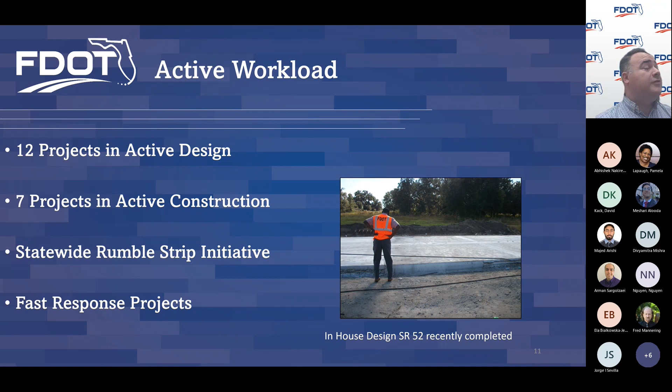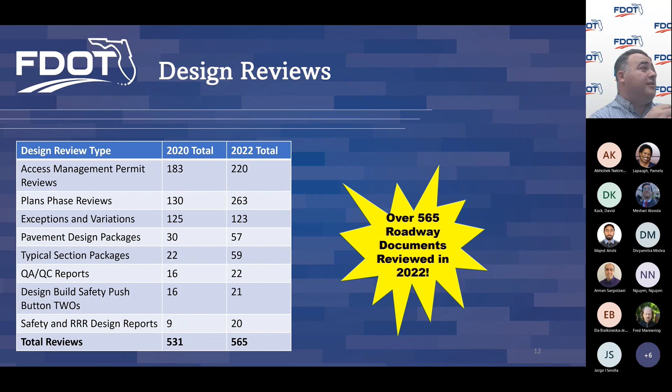We also do a tremendous amount of reviews because we manage what we call the work program, which covers all of our projects programmed for 5 years. We have a lot of consultants - we do about 15 to 20% of designs in-house and sub out about 85% to consultants. So we have a tremendous amount of reviews we look at for all of those things, and in a given year we're doing between 530 to 565 reviews.

We also bring in consultants to do this work, so we have to procure them - about 60 negotiations per year. We're a really busy group. We also support all of the other aspects of the department: project management, traffic operations, construction, maintenance, legal, and all these different groups. We're constantly working with all these different groups to implement the work program and provide guidance on criteria and things like that.

We also have a lot of innovation - we're constantly working on different things. The latest development in the last 3 to 5 years has been 3D design and modeling with 3D design software, which we're working on.

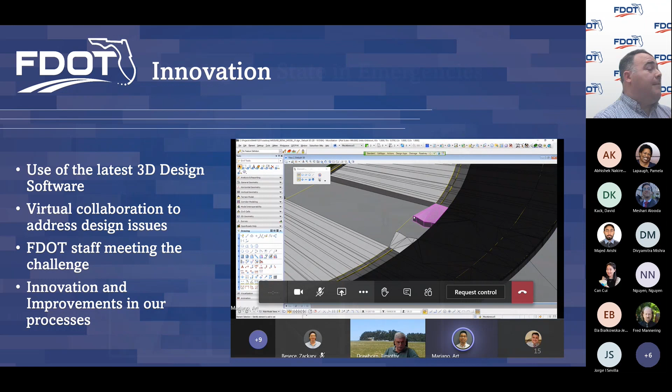One thing surprising that you might not think about is that when a disaster comes, we are called upon to support in the emergency response and preparation.

So when Hurricane Ian came last year, prior to the storm we were setting up planning for emergency detours and figuring that out. After the storm came through, we worked on emergency bridge inspection, and we were also dispatched to Sarasota and other counties to assess the damage so we could get roadways clear. You also heard about the Sanibel Causeway and the bridges that were washed out. Department staff were heavily involved, along with contractors and consultants, getting that bridge restored so citizens could get access to that barrier island. So a lot of different things.

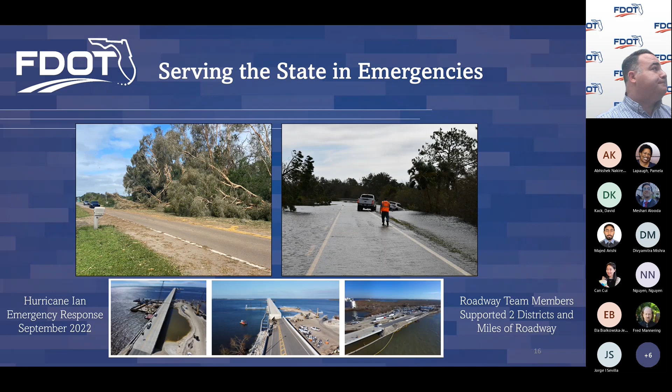I had this question, and I thought it was a really good topic to prepare everyone for when they go into their careers. So the question is, what do you think are some of the biggest challenges for engineers today? The answers to this have come through a lot of discussion internally, so I want to get your impressions of what you think is the biggest challenge to engineers today.

3D ORD, yes, that's Open Roads Designer. Politics, yeah, that's true. Politics can definitely get in the way. Solutions out of the box. Construction. Maintenance, yes.

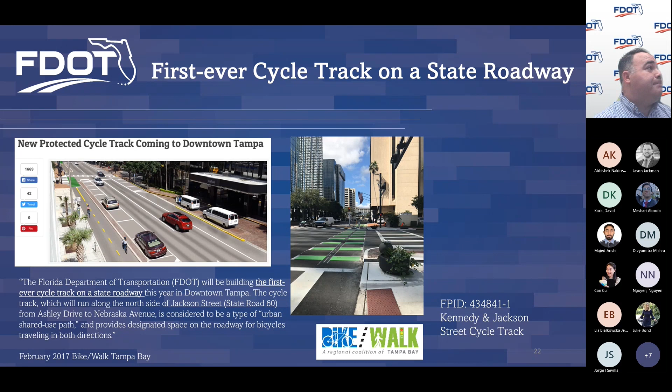About once or twice a month, we come out and ride to USF. I don't know exactly how many students ride, but we do that quite frequently. I know that CUTR also has a bike club, which Jason Jackman runs. It's a great opportunity to get out and be a user of the roadway, and it's important that we take care of all of our users—not only drivers, but pedestrians, cyclists, micro mobility users, all different types of users.

This is the Old Tampa Bay Water Quality Improvement Project. When I was a district drainage engineer, I was able to work on this project. It was brought to us by some consultants, and it's been a great project—we're seeing some really positive benefits from it.

Many of you are probably familiar with the Courtney Campbell Causeway and Ben T. Davis Beach. What we found through talking with our experts is that causeways block the natural circulation pattern of the water bodies they pass through. This leads to a reduction in water quality because that water gets stagnant, and it adversely impacts seagrasses and marine life.

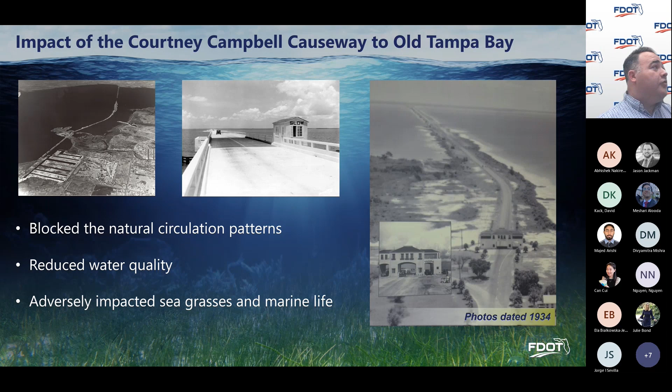So what was presented to us was this project, whose goal was to meet the department's mission, which we shared with you earlier: meet stormwater treatment criteria and exceed it, enhance overall watershed quality, and reduce project footprints and impacts to communities. That was the goal of this project.

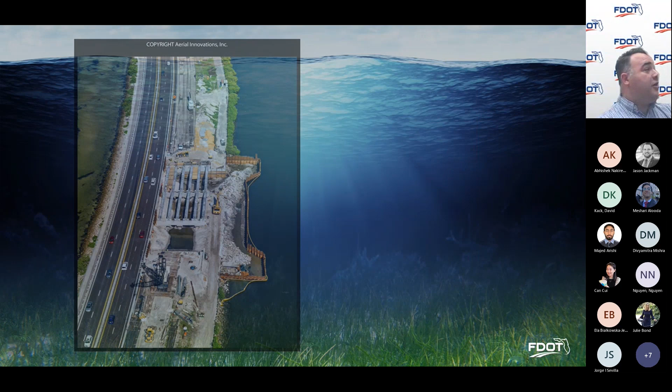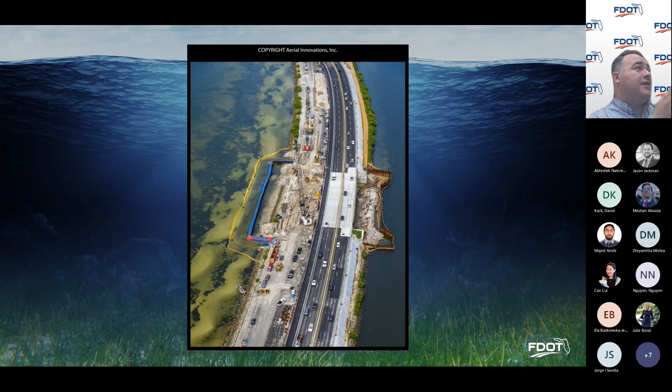These photos show the location and construction of the cut we made in the causeway so that we could restore the natural circulation pattern. They're interesting because they show the construction of a bridge using a cofferdam, and the different ways we worked to dewater the site and construct that bridge to restore that natural connection and flow pattern throughout the area.

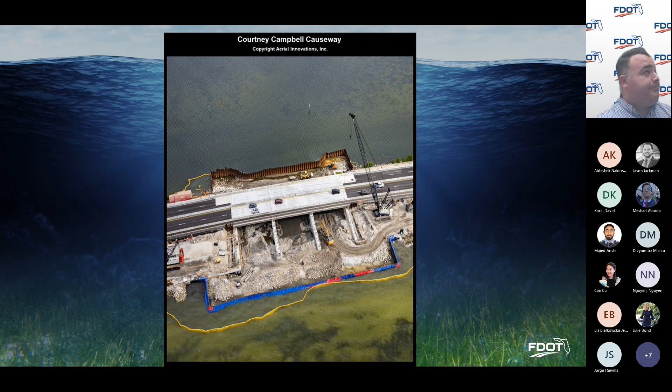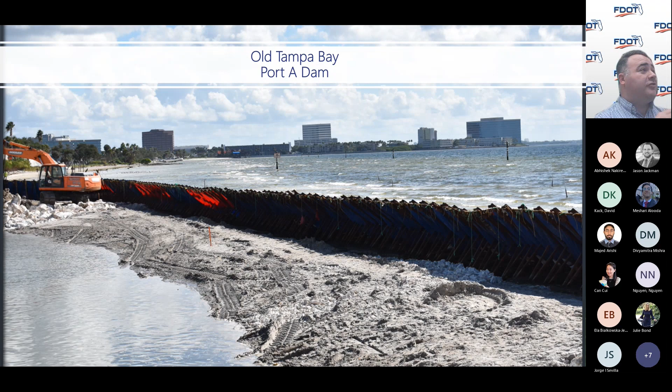This was also another innovation the contractor proposed. They used what they called a Port A Dam, basically a steel bracing system with a high-level liner, which blocked water from entering the construction site. It was a very interesting technique that they used.

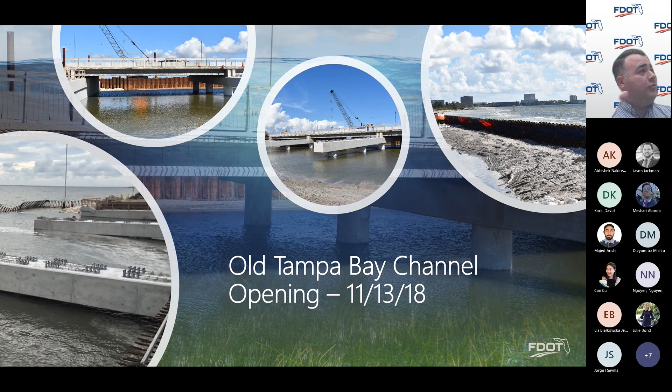The project, or the channel, was opened in November of 2018. Then we did a dye test to confirm that we were going to get the circulation and restore that natural circulation pattern.

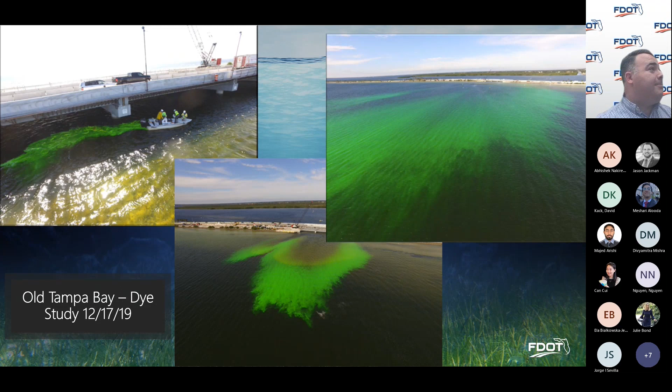Through our studies, we've been going back and studying the effects of this, and we found that we have indeed restored the natural circulation pattern. We restored the natural salinity balance, which was another issue. We've decreased chlorophyll and nitrogen levels, which are primary drivers of algae blooms. And we created a wildlife crossing—we've seen manatees and all sorts of animals going through there.

Sadly, right now seagrasses have been a huge issue for the bay, and we've been seeing a lot of decline overall in all the seagrasses. But what this project has done—and we believe that as we decrease pollutants and nitrogen discharges to the waters—we're going to get growth in seagrasses. We hope in the future we're going to see more seagrass growth. We've set the stage now with this project that we're going to see, hopefully, a lot of seagrass development in that area. That's been a big push for us.

I also want to highlight the person who worked on this with me, Virginia Creighton. Unfortunately, Virginia Creighton passed away a couple of years ago, but we were honored to have the ability to name the bridge after her. If you go out to Ben T. Davis Beach, a little bit past there—about 1,000 to 2,000 feet past, leading towards Pinellas County—you'll see that cut in the causeway, and that is the Virginia Creighton Bridge, named after our co-worker who worked on that project. A lot of times you might see other names, but we were happy to get an FDOT staff member named after that. She was a great environmental scientist and advocate for the environment.

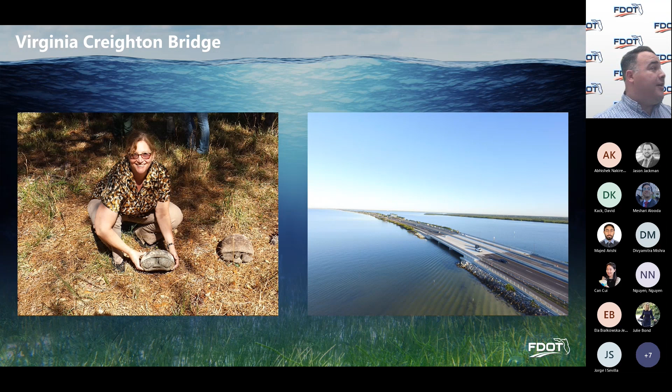So that was this project, and it's a great project—we really think it would be very beneficial.

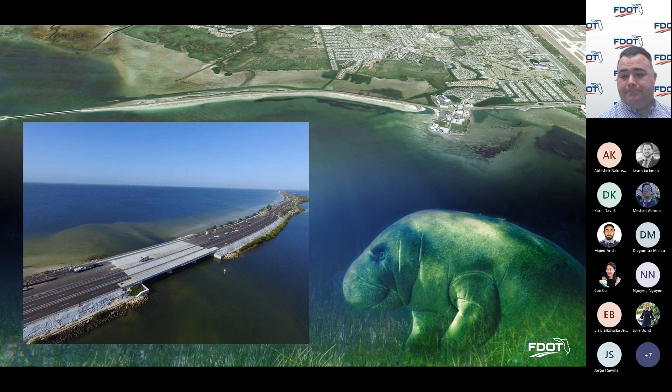Also want to talk about projects that make a benefit to safety. This is another project that we've recently completed. This is a pre-developed aerial of this intersection, at US 98 and Citrus Way. In this area, we were having a lot of problems with serious and fatal crashes. We actually had 8 fatalities within a period of 5 to 6 years, and we really had to do something to resolve that dangerous occurrence.

So we looked at several different options. We looked at signaling it. We looked at different ways that we might improve it. So the department decided to use a roundabout, a modern roundabout.

In Florida specifically, early results have shown that implementing roundabouts has resulted in a 15 to 47% reduction in all crashes and an 80% reduction in serious injuries and fatalities. Roundabouts that are properly designed can be very beneficial to safety. There are roundabouts that could use a lot of improvement, but a modernly designed roundabout has tremendous positive benefits to safety, and this has been shown through FHWA and also through studies that FDOT has done.

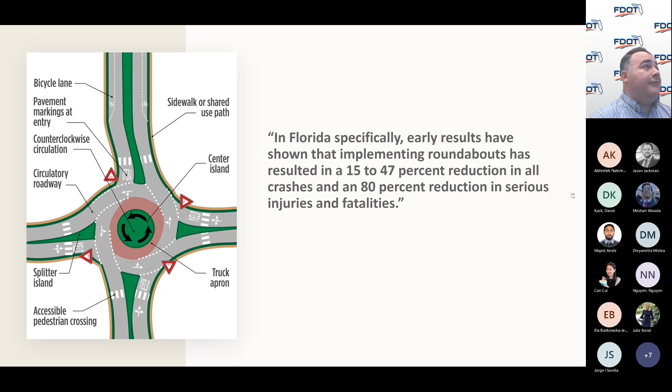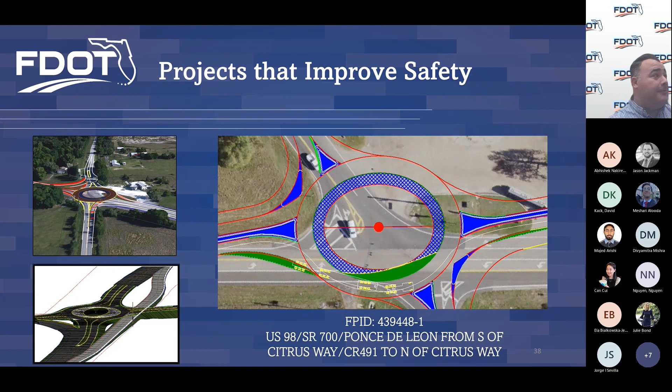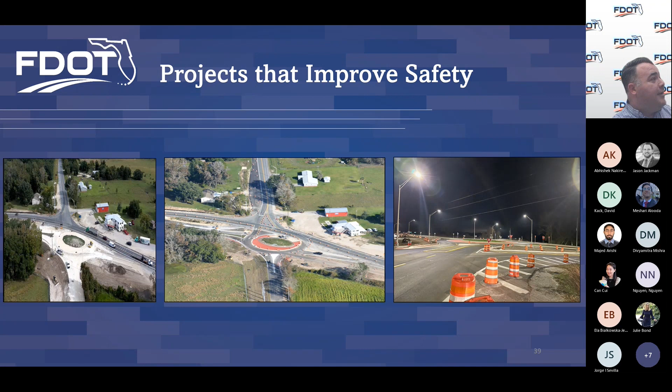These are some exhibits through construction, stepping through some different areas, and this is a recent photo of it completed. This project was done by our in-house design group, and we're really proud of this because we feel like it's going to be very beneficial to safety and improving things for the community.

A lot of people in the public are generally very concerned about roundabouts and how they use them. We've been working on a lot of education and outreach to educate the public about the benefits of roundabouts. A lot of them are very concerned when they're originally put in, but once they have them and get used to them, they really like them. So it's something we work on, to educate the public on roundabouts and the benefits.

So I thought about this before coming, and I wanted to give some advice for new engineers and those coming in.

The things that I came up with: do something that you're passionate about, whether it's safety, design, construction, or preserving the environment. Do something that you're passionate about.

Be a good communicator. A lot of engineers can be super technical, so it's really important to work on communication, to be able to convey, support, and present ideas. That's something very important. One thing I did was go through Toastmasters, which is a huge benefit for learning and practicing communication. And never stop learning. For those graduating, learning doesn't stop at graduation—it really should absolutely continue.